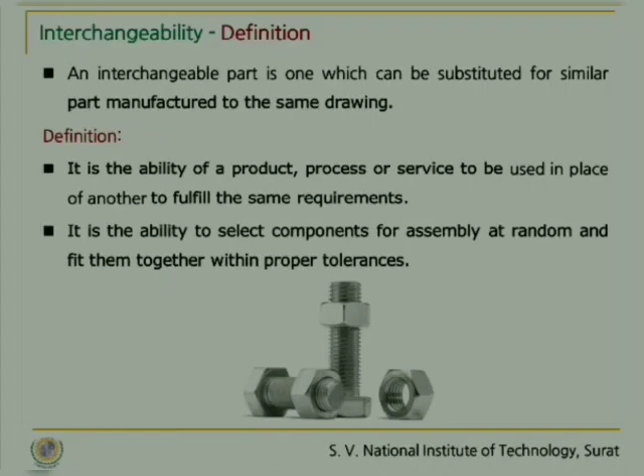Now we know that for the proper functioning of any manufactured assembly, the components must fit with each other in the required fashion. For example, if the shaft is to slide in a hole, there must be enough clearance between the shaft and the hole so as to allow the oil film to be maintained in between for proper lubrication. If the clearance between these two parts is too small, it may lead to seizing of the components. And if the clearance is too large, there would be vibrations and rapid wear, ultimately resulting into failure. To achieve the required conditions, the components must be produced with exact dimensions that are specified at the design stage in the part drawing.

However, we know that it is very difficult to produce extremely similar or identically sized components. So due to inevitable inaccuracies of manufacturing methods, it is not possible to produce parts to the specified dimensions, but they can be manufactured economically to the required size that lies between two limits. With this, the terms shaft and hole are referred for external and internal dimensions respectively in our entire discussion.

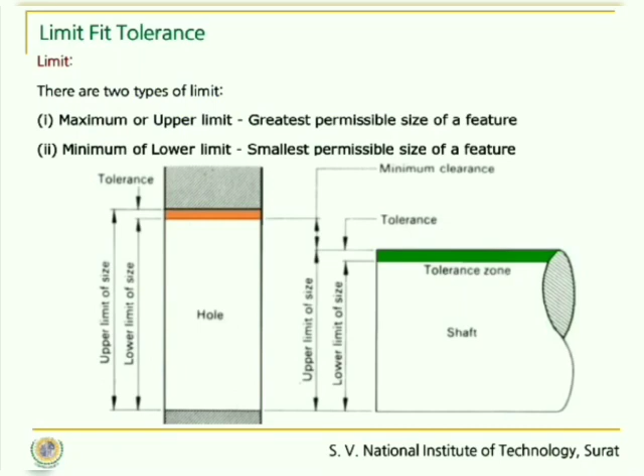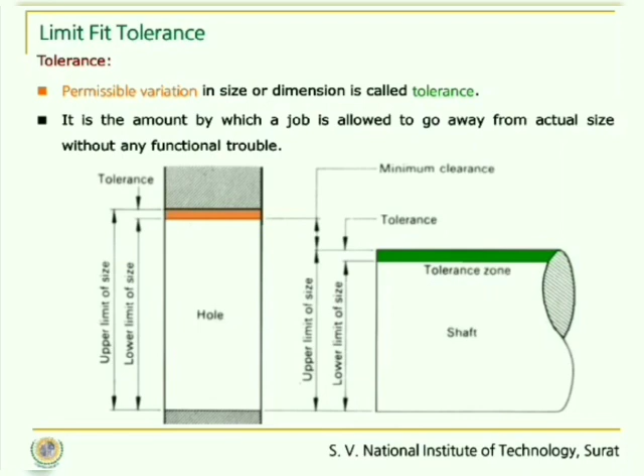Now, when we understand the upper and lower limit, we come to the concept of tolerance. The permissible variation in the size or a dimension is called tolerance. It is the amount by which a job is allowed to go away from the actual size without any functional trouble. So the entire span between the upper limit and the lower limit is known as tolerance.

If we take this example, here in this particular case, the upper limit of the dimension of a hole is 31.78, whereas the lower limit is 31.75. So if we try to find out the tolerance, that is the total amount of variation, that comes out to be the difference between the upper limit and the lower limit, which is 0.03 in the present case.

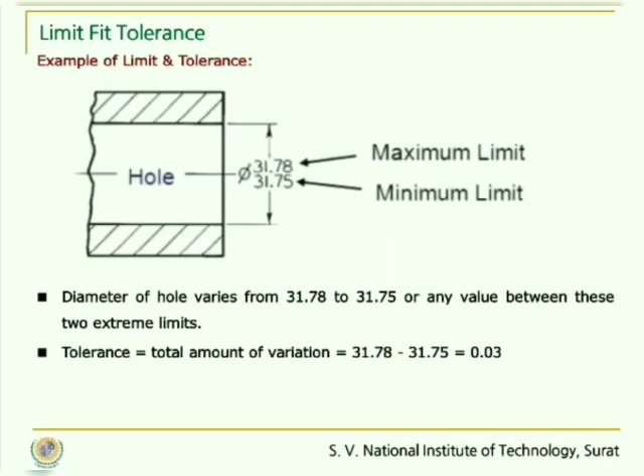Now, why is tolerance necessary? We know it is impossible to manufacture a part or a component to an exact size or geometry, so variation from the drawing is inevitable. In such a case, if some acceptable level of variation is applied, it would help. However, if the variation is large, it would affect the functionality of the part, and if the variation is too small, it would affect the economy of the part.

Generally, for parts which have smaller, that is tighter tolerances, the cost of producing it increases because of two main reasons. First, special methods of manufacturing are required, which would be costly. And the second reason is this might require a greater level of inspection, which would result into a larger number of rejections.

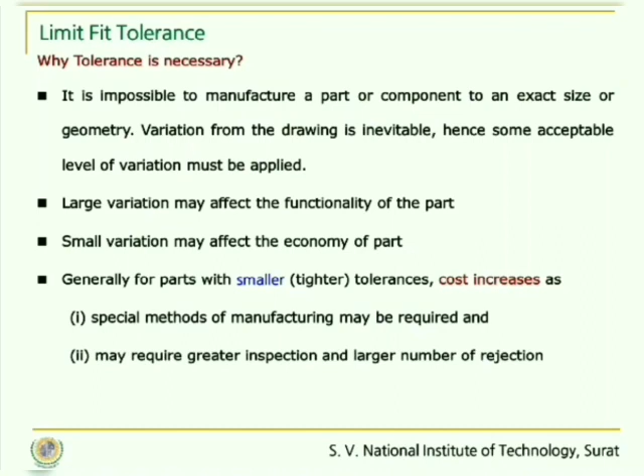Now we would discuss the types of tolerance. There are two types of tolerance: unilateral and bilateral. In unilateral tolerance, the dimension of the part is allowed to vary only on one side of the basic size, that is, the tolerance lies fully on one side of the basic size, which can be either above the basic size or below the basic size. Now, basic size is the dimension specified in the part drawing.

Take for example, 25.00 is the basic size. Now we can specify the tolerance in four different conditions. Two of them can be the case where one of the upper or lower limit is equal to the basic size, and the other two cases can be where the upper and lower limit are quite higher or quite lower than the basic size.

The first example suggests 25 plus 0.02 and plus 0.01. So the upper limit is 25.02 and lower limit is 25.01. So we understand that the upper and lower limit in this case lie quite above the basic size.

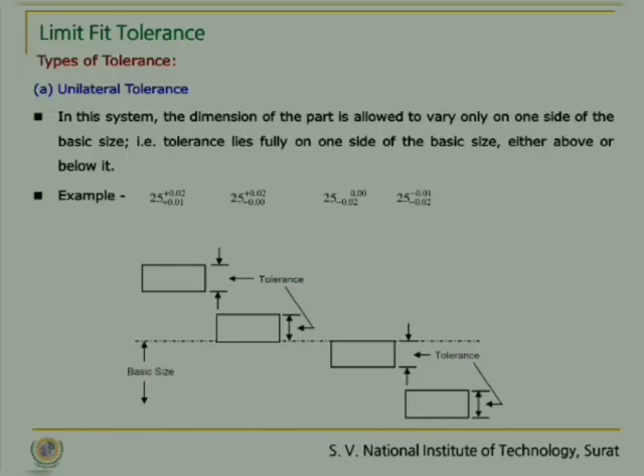The second type of tolerance is called the bilateral tolerance. In specifying bilateral tolerance, the dimension of the part is allowed to vary on both sides of the basic size. That is, the limits of tolerance lie fully on either side of the basic size.

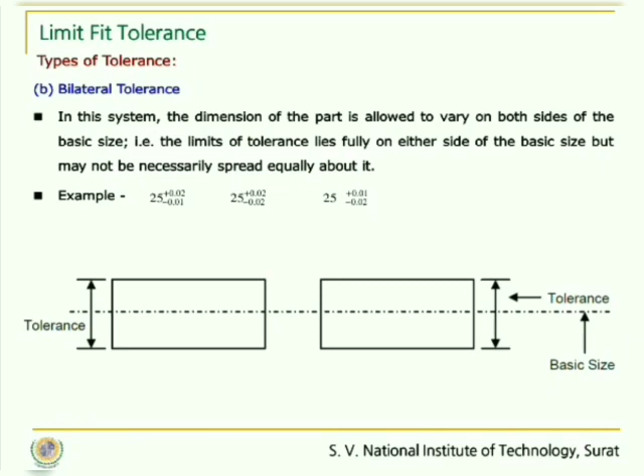It is important to note here that these limits of tolerance may not be necessarily spread equally about the basic size. So there can be a case like 25 plus or minus 0.02 where the spread across the basic size is equal, and there can be a case like 25 plus 0.02 and minus 0.01, giving the upper limit as 25.02 and lower limit as 24.99. Here we note that the spread of the limit of tolerance is not equal on either side of the basic size.

Thus, there are different ways of specifying limits and tolerances. We may directly specify the value of limits like 1.498 and 1.497 being the upper and lower limit respectively. Sometimes we might specify only a single limit tolerance, or it can be the case of bilateral or unilateral tolerance as discussed just now.

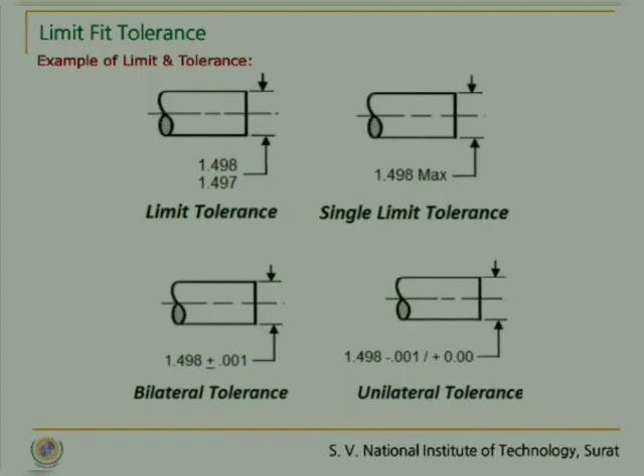Now, before discussing the concept of fits, we will have to go through certain general terminologies to be used. Shaft is a term that is used conventionally to designate all external features of a part, whereas hole is a term which is conventionally used to designate all internal features of a part.

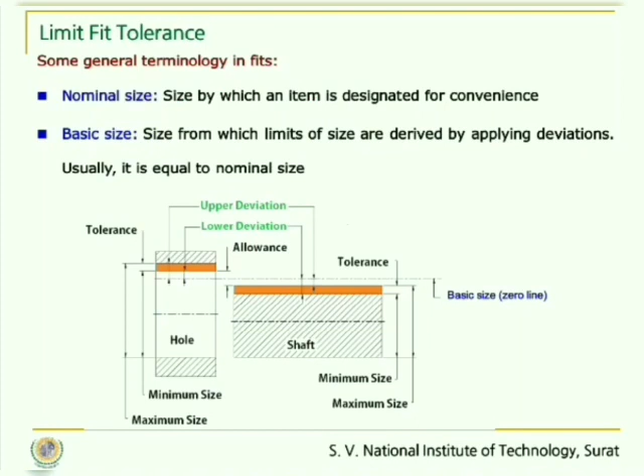Nominal size is the size by which an item is designated for convenience. Basic size is the size from which limits of the size are derived by applying certain deviations. Usually basic size and nominal size are equal.

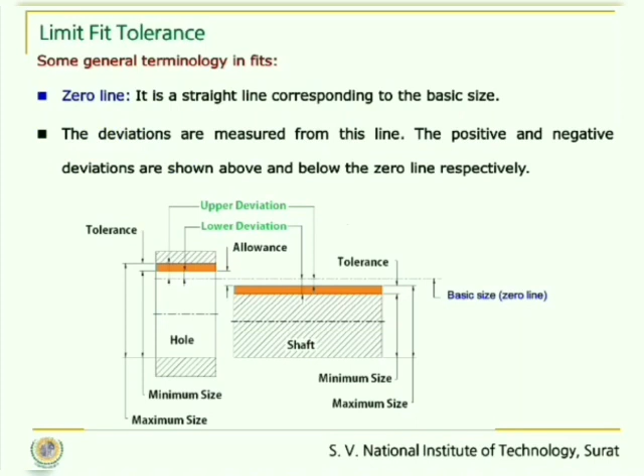There is another term, the zero line, which is a straight line corresponding to the basic size. The deviations are measured from this line. The positive and negative deviations are shown above and below the zero line respectively.

Allowance is another important term. It is the difference between the basic dimensions of mating parts. If you see the figure, the allowance can be considered as the difference between the lower limit of the hole and the upper limit of the shaft.

So as shown in figure, when the shaft size is less than the hole size, then the allowance is positive. But when the shaft size is greater than the hole size, then the allowance is negative.

We come to another important terminology, deviation. The algebraic difference between a size and its corresponding basic size is known as deviation. The value of deviation can be positive, negative, or zero. There are two basic types of deviation, the upper deviation and the lower deviation.

The algebraic difference between the maximum limit of the size of the hole or shaft and its corresponding basic size is the upper deviation. Upper deviation is denoted by capital ES for hole and small es for shaft by convention.

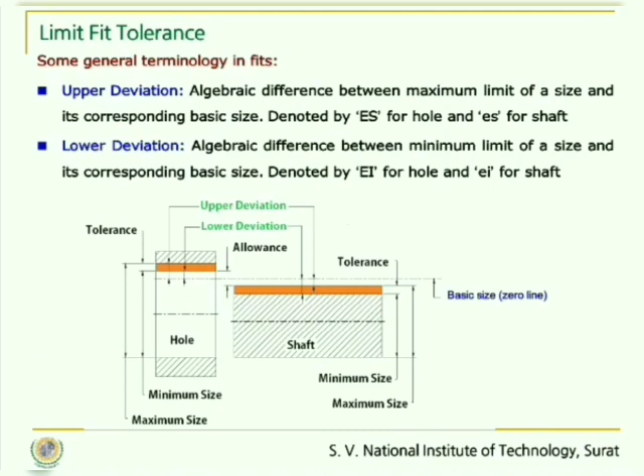If you see the figure, the lower limit of hole and the upper limit of shaft are closer to basic size, and this leads us to the fundamental deviation. Fundamental deviation is the minimum difference between the size of a component and its basic size.

So conventionally, fundamental deviation is identical to the upper deviation of shaft and the lower deviation of holes. Let me repeat. If you see the figure, the upper deviation for the shaft and the lower deviation for the hole is the fundamental deviation.

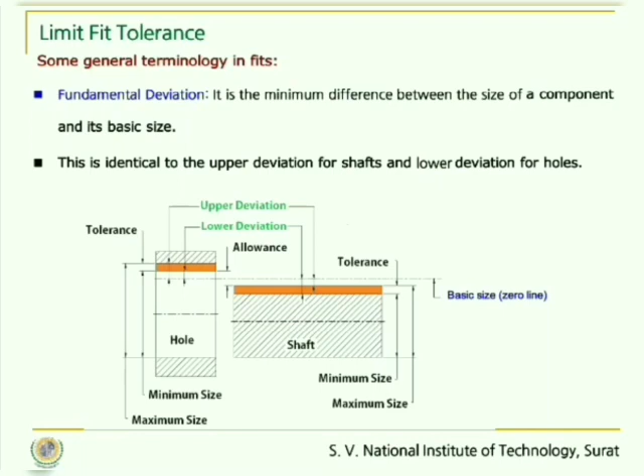Let us try to understand this with another figure. The basic size of the hole and the shaft is denoted by the vertical red line. So considering the upper and lower limits and the tolerance which is specified for the shaft and the hole in this figure, we can very easily identify the upper and lower deviations.

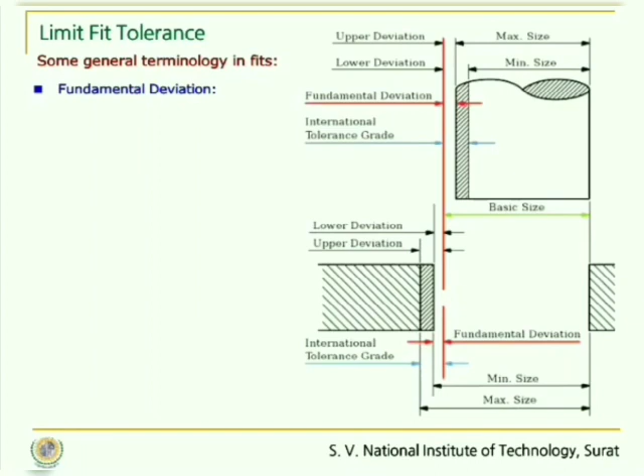In case of shaft, the upper limit is closer to the basic size, and hence the upper deviation is the fundamental deviation. If we consider the case of the hole, the lower limit of the hole is closer to the basic size, and hence the lower deviation is considered as the fundamental deviation.

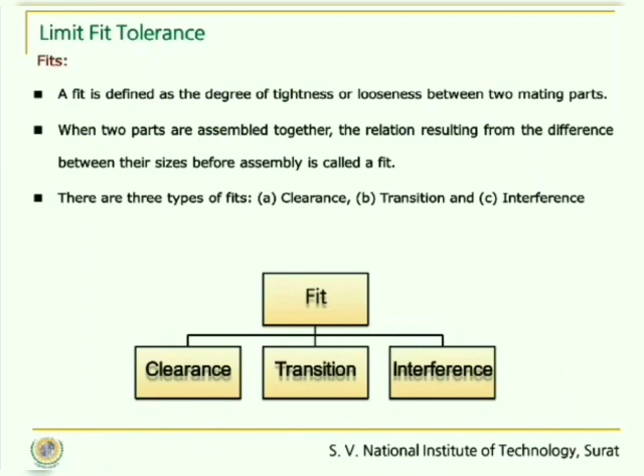Now we come to the concept of fits. A fit is defined as the degree of tightness or looseness between two mating parts. When two parts are assembled together, the relation resulting from the difference between their sizes before assembly is called a fit. There are three types of fit: clearance fit, transition fit, interference fit.

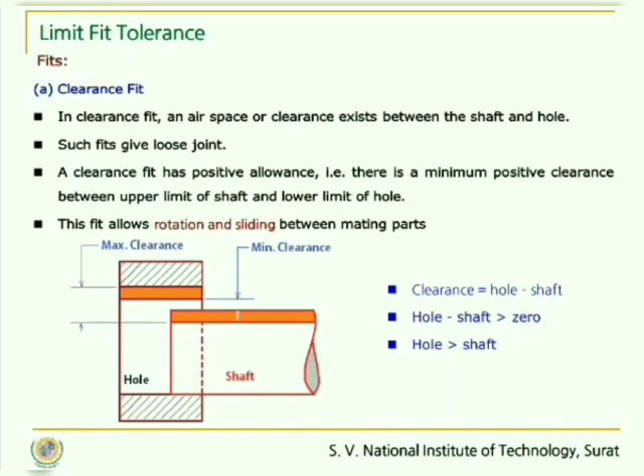In clearance fit, an airspace or clearance exists between the shaft and the hole, so such fits provide a loose joint. A clearance fit has positive allowance, meaning there is a minimum positive clearance between the upper limit of the shaft and the lower limit of the hole. The clearance comes from the difference between the hole and shaft dimensions, which is always greater than zero, so the hole dimension is greater than the shaft dimension. This fit allows rotation and sliding between mating parts.

Another type of fit is the interference fit. Here, there is a negative difference between the diameter of the hole and the diameter of the shaft, since the shaft diameter is always larger than the hole diameter. So this type of fit has a negative allowance, and an interference exists between the upper limit of the hole and the lower limit of the shaft. In this case, the hole dimension minus the shaft dimension is less than zero, so the hole dimension is always smaller than the shaft dimension. This type of fit is used where motion or power is to be transmitted.

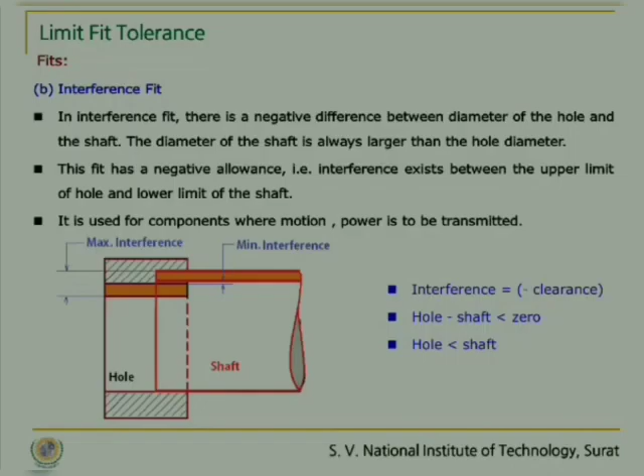The third type of fit is the transition fit. Transition fit may result in either a clearance fit or an interference fit, depending on the actual value of the individual tolerances of the two mating components. So we can say that transition fits are a compromise between the clearance fit and the interference fit.

If you see the figure, if the combination comes out to be the upper limit of the hole with the upper or lower limit of the shaft, it will give a clearance fit. If the combination is the lower limit of the hole and the lower limit of the shaft, that will also result in a clearance fit. But if you take the upper limit of the shaft with the lower limit of the hole, that will result in an interference fit. This type of fit is used for applications where accurate location is important, but either a small amount of clearance or interference is permissible.

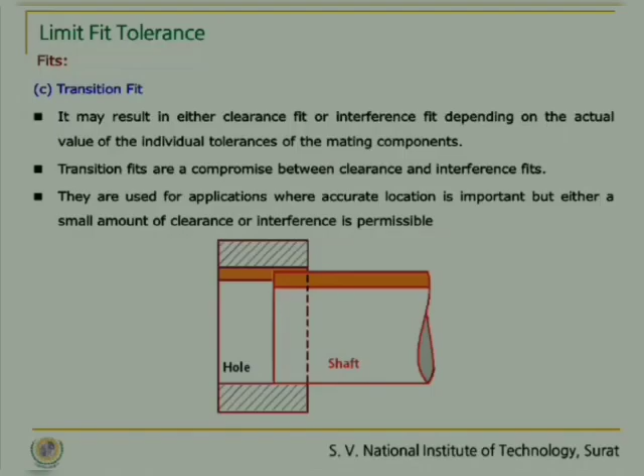Now there are two systems of fit: the hole basis system and the shaft basis system. These are used to designate the fits. In the hole basis system, the hole is kept constant. The zero line lies on the minimum diameter of the hole, that is, the lower deviation of the hole will be zero.

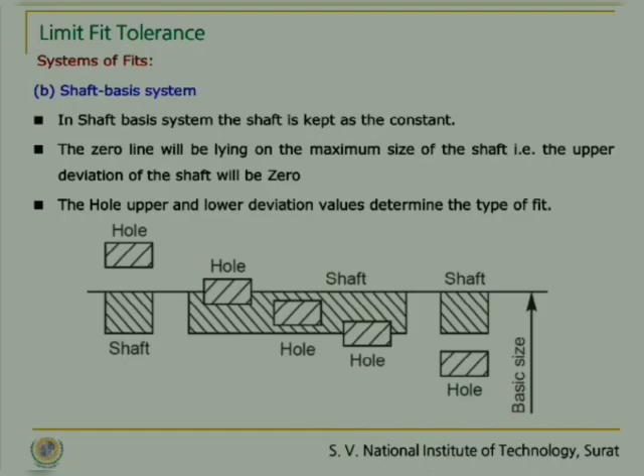This brings us to the end of the basic theory of limits, fits and tolerances. Various numericals and illustrations are available in most textbooks as well as online resources like NPTEL and IGNOU courses. I hope you would go through those illustrations and numericals for a better understanding of this theoretical background. Thank you very much.